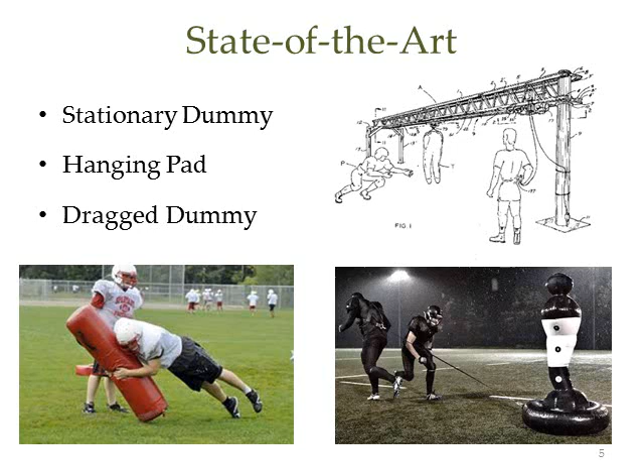The first is the stationary dummy, which is in use by most teams and allows a static target for players to tackle. The hanging pad attempts to mobilize this, however only does so in one direction and doesn't allow players to integrate the three phases of the tackle by bringing the pad to ground. Drag dummies have come the closest, however their unrealistic weight distribution and ineffective acceleration cause an unrealistic tackling environment.

With this in mind, and based on conversations with players and coaches, we've come up with a set of driving requirements including unpredictable motion, safety to tackle, it has to function in the same conditions that a football team practices in, and it needs to give realistic tackling resistance.

In addition, we've come up with a set of performance requirements which will allow our device to be highly effective, including easiness to reset, which allows a large number of repetitions in a short period of time, which is essential for large football teams. It needs to be easy to store and take on and off the field, and within the budget of a football program.

With this in mind, we took a step back and looked at the real problem. We need a safe way of effectively practicing tackling. And so, the solutions we came up with grouped into three categories. We could make tackling safer, use existing technology, or innovate to mimic player movement.

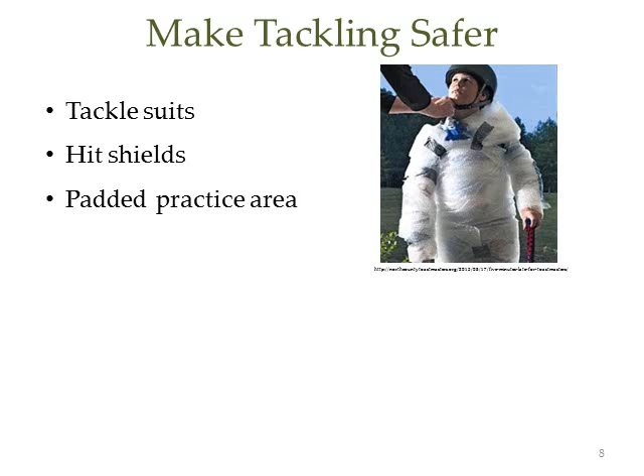In order to make tackling safer, we first looked at using tackle suits. These are a layer of padding which players can wear to help protect them against injury. These don't effectively mitigate the risks of player-to-player contact and don't protect against concussive injuries. We looked at hit shields, which essentially accomplish the same thing, however with reduced player mobility.

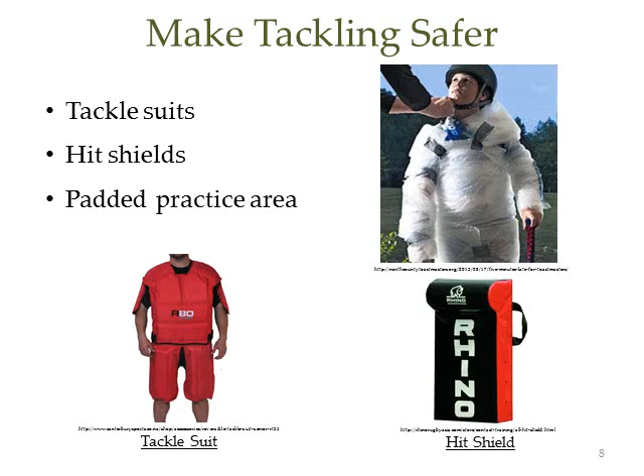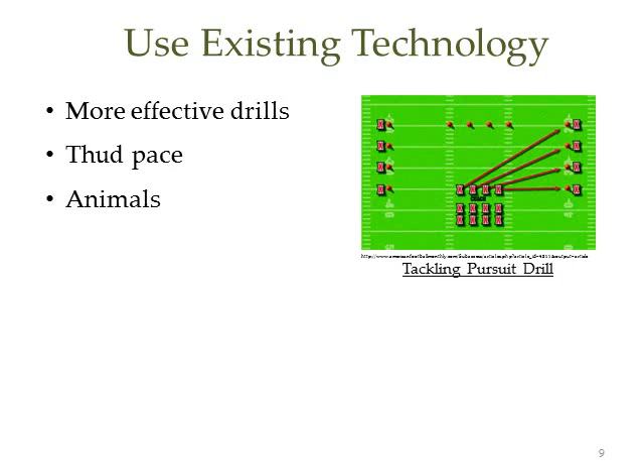We then looked at using existing technology, such as making more effective drills, or practicing at thud pace, which is essentially the first two steps of the tackle, however after the wrap-up, the player is not brought to ground. We also looked at employing animals, however we decided that this wasn't ethical, so we moved forward. This led us to the conclusion that we needed to develop some sort of mobile tackling device.

It would need some sort of infrastructure, whether it's freestanding, on a track, or hanging. It'll have a certain number of degrees of freedom that are given by a type of motion, whether that's leaning, rolling, sliding, or launched by wheels, tracks, a sled, or rope. It needs to be reset by some means so that it can be tackled by the next player. And this motive force is going to have to come from somewhere.

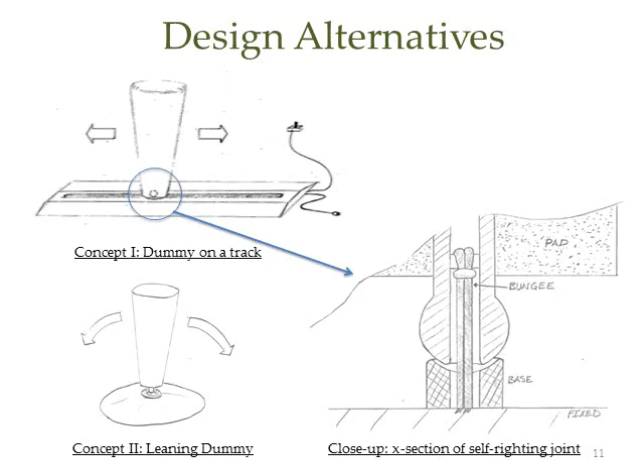With this in mind, we came up with design alternatives which combined different elements that we had brainstormed. We vetted these against each other and decided that a freestanding dummy would be most effective to eliminate risks of injury from infrastructure and also allow ease of setup and takedown.

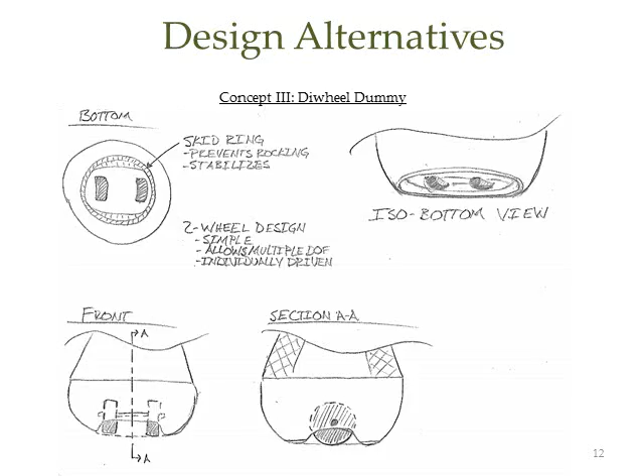This diwheel dummy uses parallel wheels and a freestanding geometry which allows the dummy to be self-righting after being tackled. The simple design has a skid ring which allows stability and can move in any direction on the field. This accomplished almost everything we were looking for, however, it didn't quite have the instant acceleration in any direction we were hoping to have.

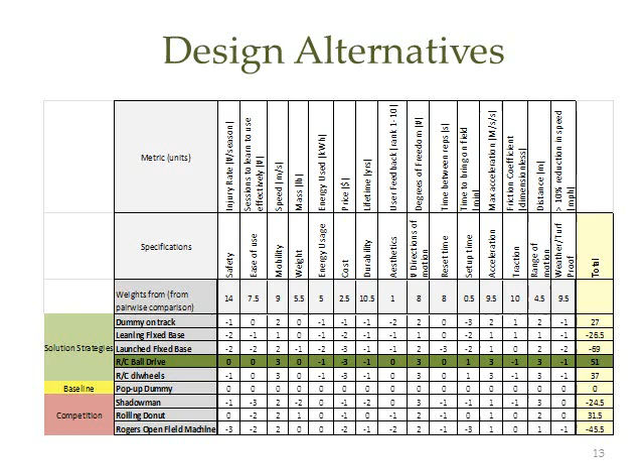When we vetted the designs against each other, we determined that an RC ball drive would accomplish these. The specifications we were using were based on baseline scores from NFL combines and were weighted against each other using a pairwise comparison. The fact that this remote control ball drive met all of our specifications and was the clear winner meant that we would move forward with it.

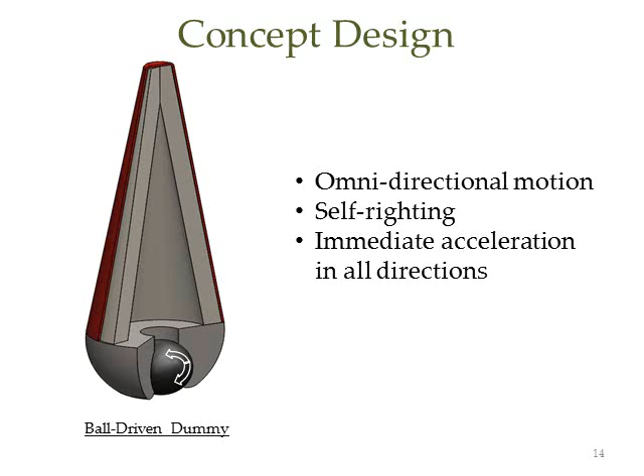Our initial concept design had an upper padded cone for a tackling target with a lower area that contained the ball drive system, which allowed for omnidirectional motion and immediate acceleration in all directions. And so we started looking for ways to control this ball.

First we found the Sphero, which is a children's toy, which is powered inside by essentially a Segway, and has the omnidirectional motion we were looking for. We thought, okay, great. How can we scale this up and use it for our purposes? And we ran into a number of issues with this internal drive system. We thought, well, we'll keep it simple. Let's look at external drive systems.

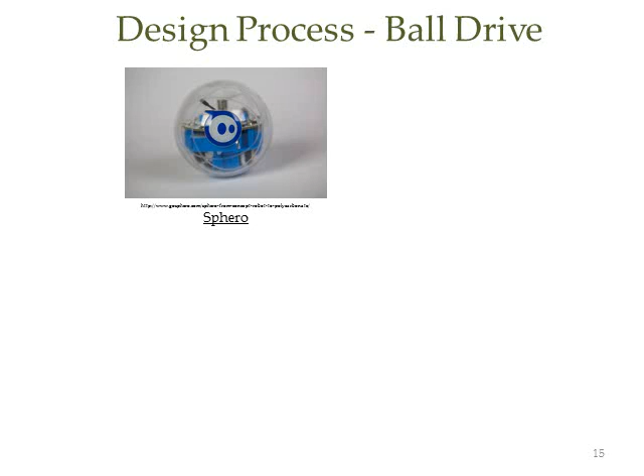And we found these ball balancing robots, which use Omni wheels and a solid-state gyroscope to keep them stable. And, while this would be effective, it was overly complex. We want something that's going to be simple and robust enough to be tackled over and over, and still cheap enough to be afforded by most football teams.

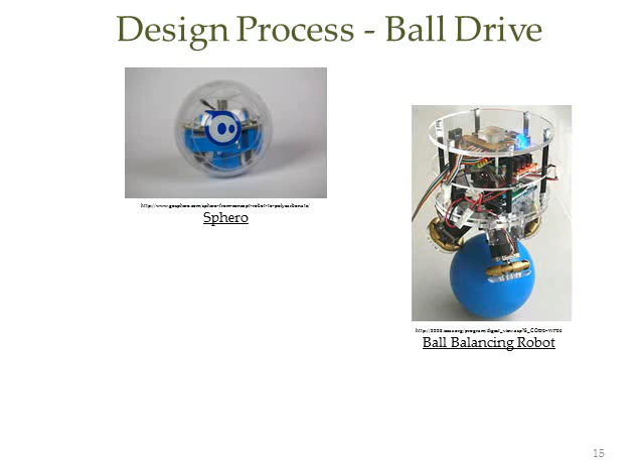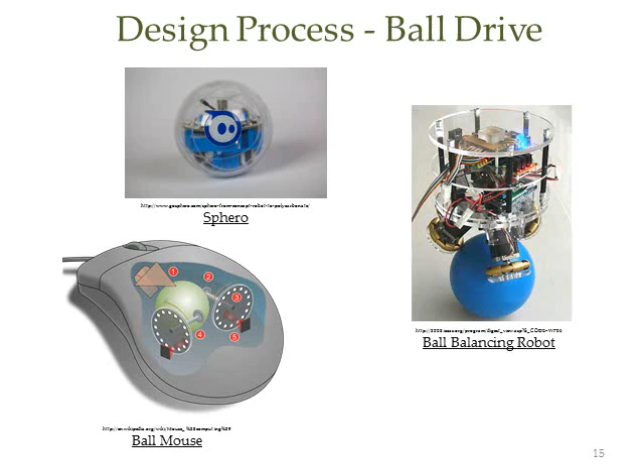And so we kept looking around, and we found the traditional ball mouse. The ball mouse uses a ball to drive rotors in multiple directions, and we thought, well, we can just take this concept and put it in reverse and use rotors to drive a ball. That's essentially what we did.

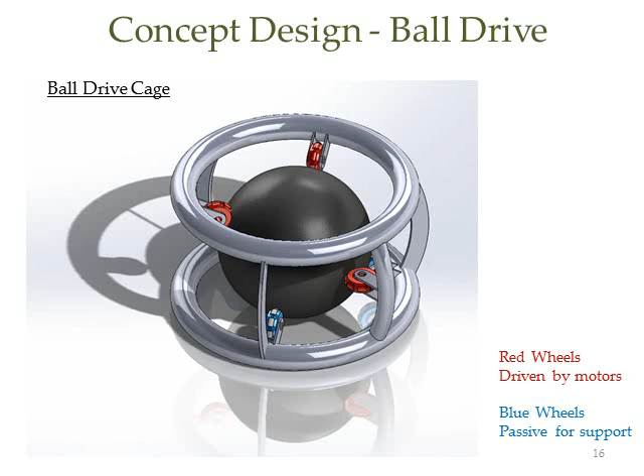So we came up with this model of a ball which is powered by these Omni wheels. Their perpendicular nature would give motion in both the X and Y directions, and a third Omni wheel will allow rotation to justify the front of the tackle dummy with the way that the user is facing.

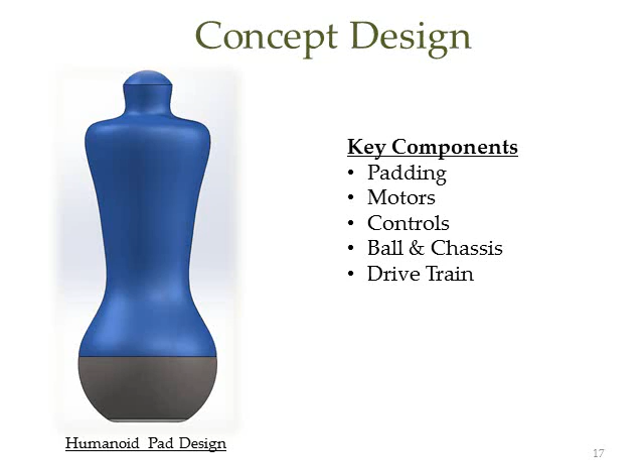And so this concept design has a number of key components, including the padding, the motors, control systems, ball and chassis, and the drivetrain. We immediately dove in with prototype development using whatever materials we could get our hands on. We finally came up with a proof of concept model which used a Sphero as the ball drive and styrofoam, foam core, and paper as the dummy.

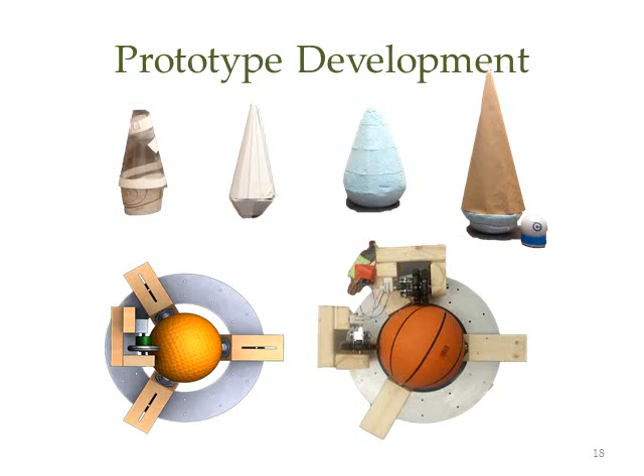When this worked exactly as we had suspected, we moved forward with a full-scale prototype of the drive system, as we saw this as the greatest risk to our success. We wanted it to be as modular as possible, and so we used 2x4s and aluminum. This would allow easy adjustment to lock down key design parameters, such as ball height, ball size, and position within the base.

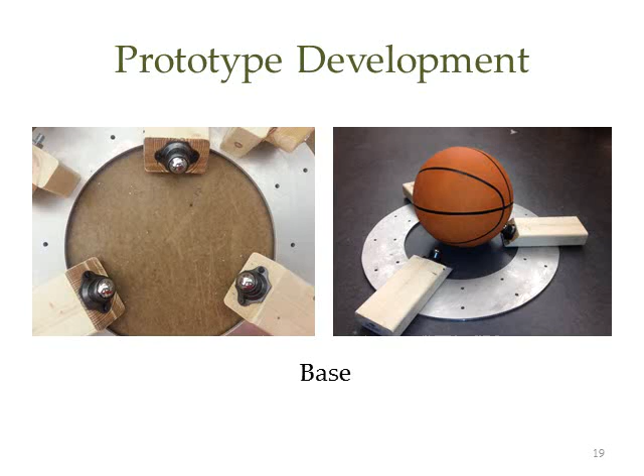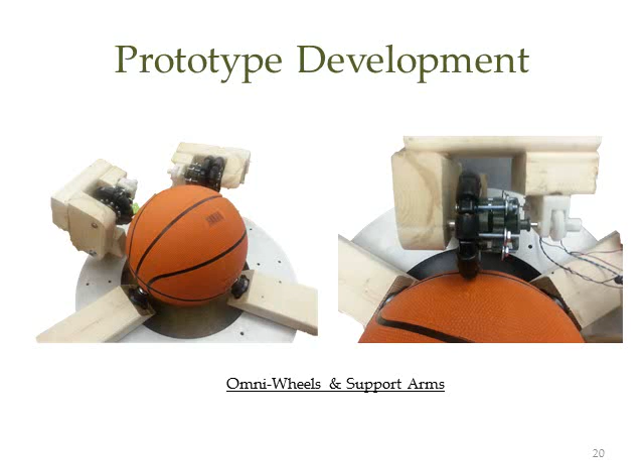We continued using a set of motors in U-brackets. These were on hinges, which also allowed for easy adjustment of the ball. We started out using a set of remote control tank motors. These were desirable because they came with a remote control system and a dual speed controller, which would allow us to independently control each motor. While these proved highly effective at controlling the ball, they lacked sufficient torque to actually make the system drive.

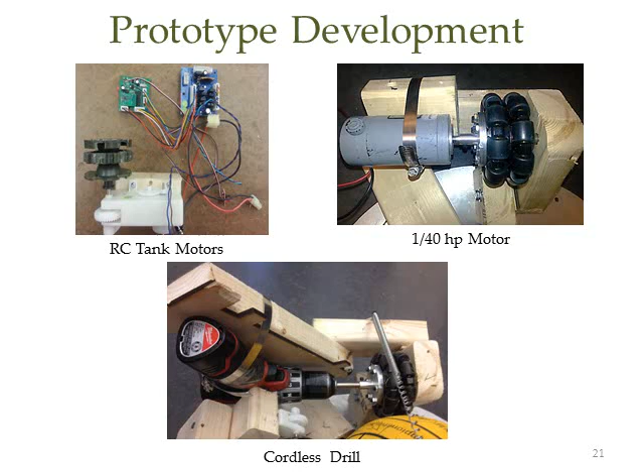And so we kept looking around for a good alternative to buying expensive motors at this stage. We just wanted design validation. And we noticed that the cordless drill that we had been using this entire time met all of our specifications. We came up with a rig to attach it to our Omni wheels and were able to test our device. And so fully assembled, our initial prototype of the drive system, while it wasn't pretty, provided some great design insight.

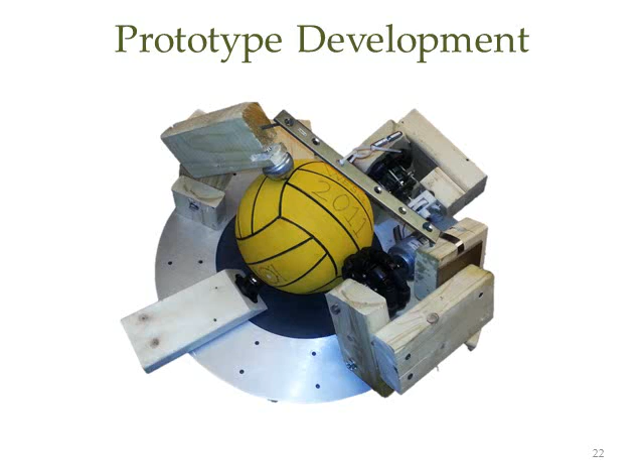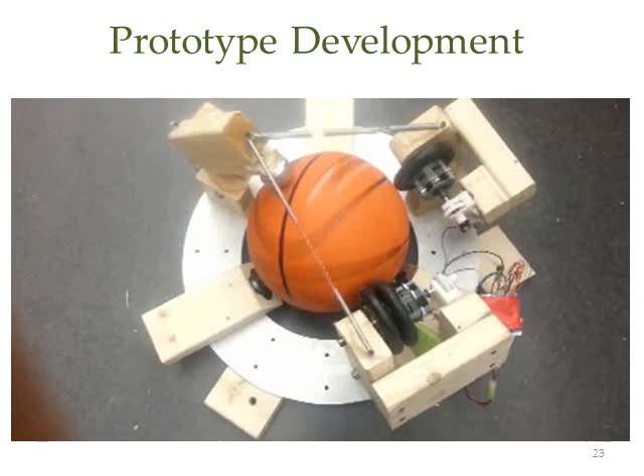Using the remote control tank motors, we were able to achieve a high degree of control. However, this revealed a number of other issues. Not only was motor power a large issue, but the eccentricity of the ball became apparent. Using springs and some other tensioning systems, we were able to overcome this challenge.

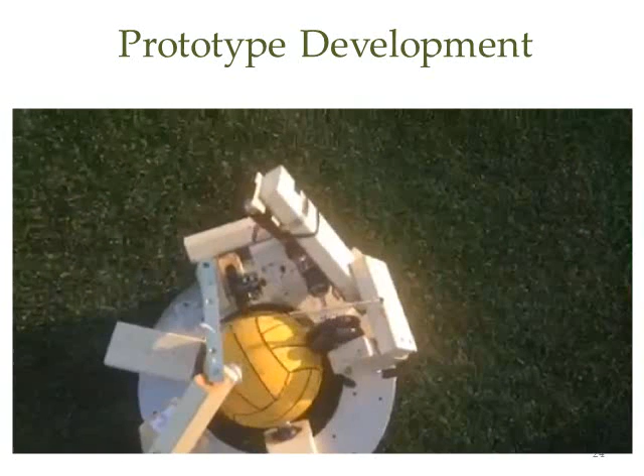Using the cordless drill, this testing also revealed a number of challenges that we'll face in the future. Beyond motor power and the irregularities of ball shape, we'll have to work with asymmetrical drag from the Omni wheels. In the future, we'll need to use opposing Omni wheels. The turf blades and infill, as suspected, became a large issue. We'll use brushes in order to keep them out of key components.

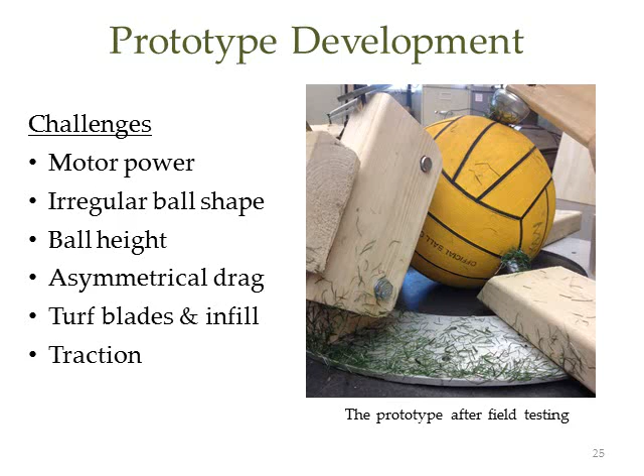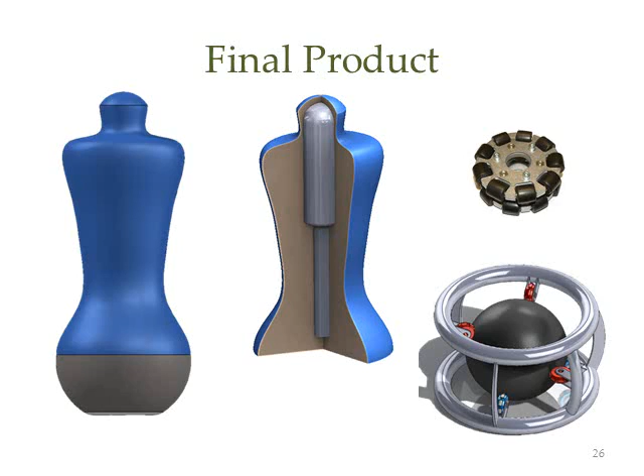Our final product will consist of an upper padded foam section made of a lower density open cell foam, which is given structure by an inflatable tube. This prevents any risk of injury and has a great strength to weight ratio. The lower portion will be made of a higher density closed cell foam, which will protect the ball cage and all control system components.

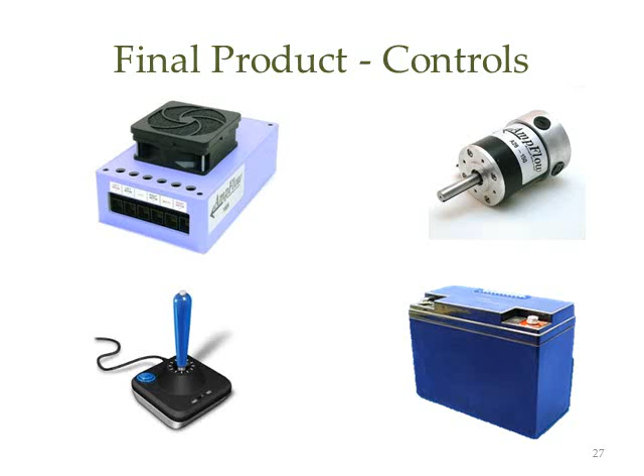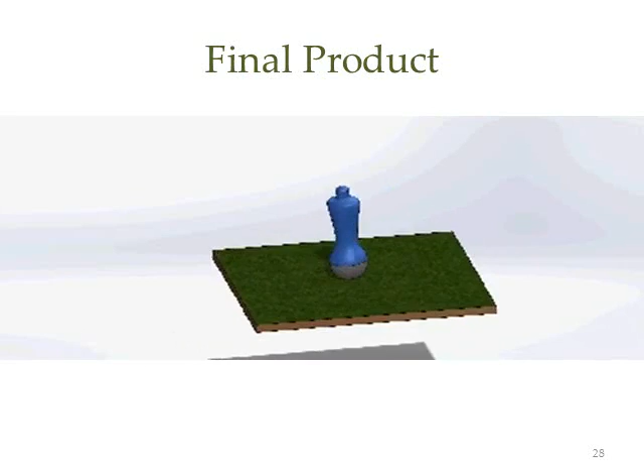The control system we've selected is remote control, using a dual speed controller to control each motor individually. We have batteries selected, and a joystick will offer intuitive control by any operator. The CAD model we built of our final product allowed us to perform a motion analysis to ensure that it will still be self-righting. With the force applied to imitate a tackle, we found that it was.

With a production cost of almost $2,000 and a projected sale price of around $5,000, which is on par with other products on the market, we found that a startup company which will use loans to finance all costs will be profitable by the end of the first year, and this is with 20% growth per month in mind.

The fact that there are over 40 professional teams and 200 NCAA teams in the market for a product like this means that by the end of the second year, we will be well into the profitable region, and we believe that there is a serious market feasibility here. We have an aggressive project timeline and hope to have a working prototype done by mid-February. This will allow testing and revision to take place and for us to have a deliverable by March.